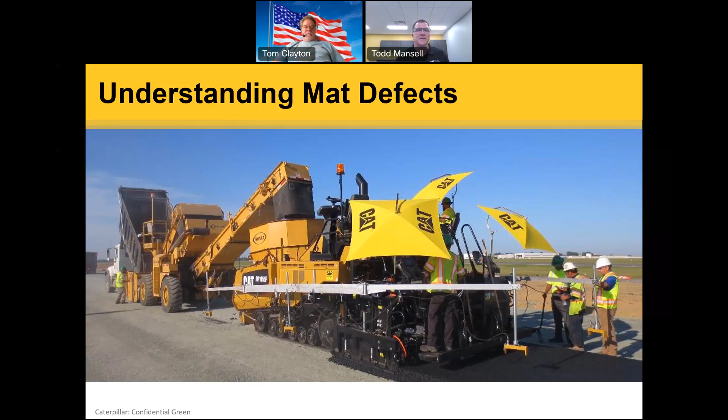So what I would like to get into is talking about understanding mat defects. One thing I always like to start off with on this topic is, how do I know if I have a mat defect? To me, it's obvious. So I'm looking behind the paver here as we're going along.

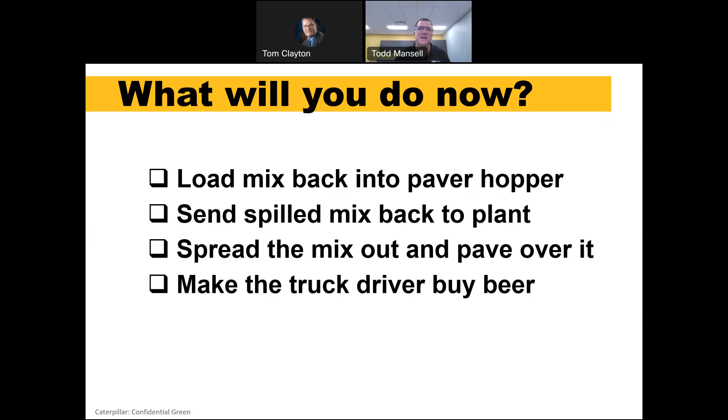But we saw that last image. So if I spilled mix in front of the paver, what would you do next? Are you going to load that mix back in, send it back to the plant, spread it out, pave over it, make the truck driver buy us a case of beer? I don't know, maybe, maybe some of all of the above. But what problems do those spills cause?

So again, that was a truck rolling away from the paver. There are other ways we can get these spills on the grade, but what do those spills on the grade end up becoming, or how are they a mat defect?

There's a really good likelihood that cold material, we're not getting density on it because it's cooling really fast. We may pave over it and it looks nice, and we don't even see that mat defect on the surface. So the mat surface may look great.

If I'm a roller operator on a steel drum roller, there's a good chance I'm going to feel that bump as I go over that material that spilled in front of the screed. There's also a good possibility, depending on the mix size and how thick a mat I'm paving, that I may end up dragging aggregates, or dragging rock, as we say.

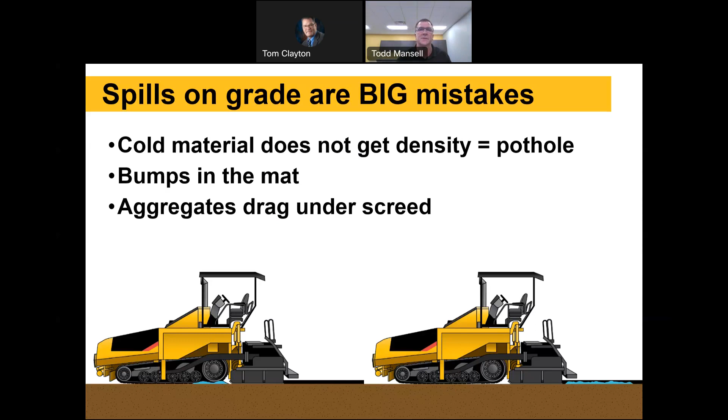But what's the end result of these spills on the grade? They quite often become potholes, right? So when I see those spills and we pave over them, and again, the surface of the mat may look nice, I call those the birth of a pothole.

And that's what you're going to see in the mat down the road. You're not going to see it right after paving. And again, you're probably going to see an effect on your IRI or your smoothness results as well with those spills on the grade. Here's a picture just showing a spill paved over, kind of dragging rock, if you will, as that screed goes over that high spot where that material spilled on the grade.

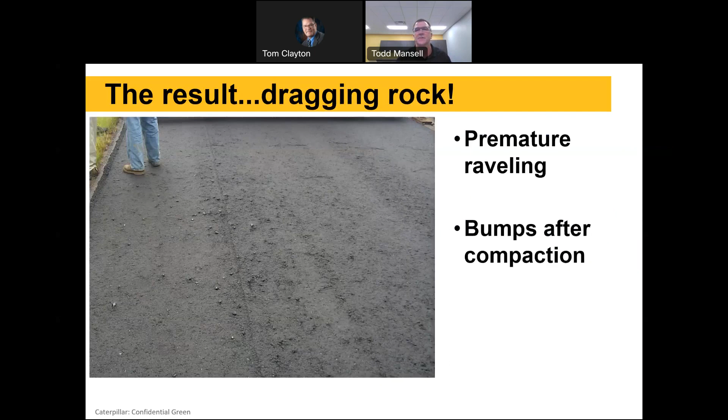So when will they show up? Again, it might be the day after - probably not the day after if you don't see it right away. It's likely to show up a year or two from now, again most likely in the form of a pothole.

So trucks spilling, that was just one example. Can you think of other situations? Banging out truck beds - I see this. I was just on a paving job right near home here in Minnesota, where I'm based, yesterday. Went out to a commercial job and they were banging their tailgates out right in front of the paver and cleaning out their truck beds, leaving those little piles of mix on the grade.

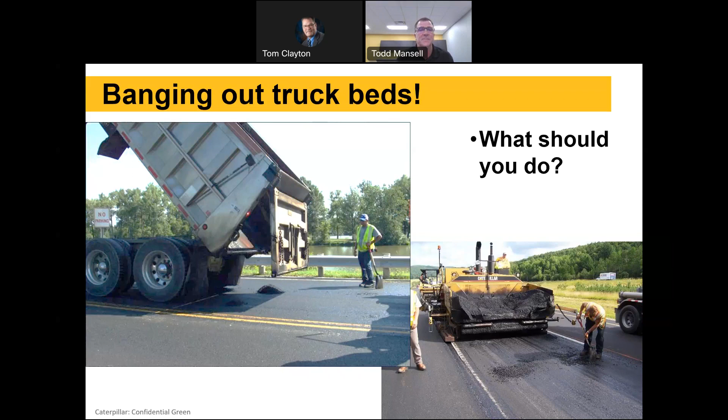So what should we do? If it's already happened and it's there, probably the best thing we can do is pick it up and throw it off to the side and get it later. Most often I'll see people spread it out a little bit - labor or somebody on a shovel kind of spreading it out a little thinner in front of the paver. Not the best answer, but better than leaving a big pile.

In a perfect world, send those trucks over to a designated clean out area, somewhere we can just dump that or bang out our tailgates or clean out our truck beds off to the side, especially on these highway jobs. So we can go clean out an area.

What do we do at the end of the day? We can, if we've got a skid steer or something on site, load that material back into a truck and send it back to the plant, to the recycle pile. Just different things to think about as far as material spilling on the grade.

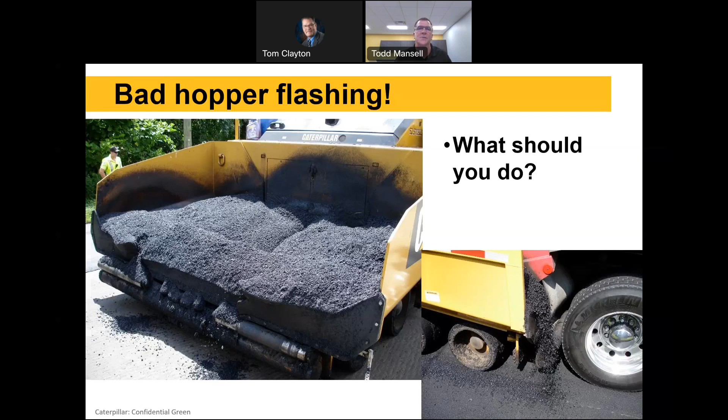Here's another one - folding the hopper wings, or in the bottom right-hand picture there, you can see the hopper flashing, the rubber belting on the front of the paver hopper isn't fitting well. So once that truck's dumping mix into the hopper, it's just all spilling out along the sides of the paver there as it goes along, cooling off and then getting compacted by the tires or tracks on the paver before we pave over it.

Folding the hopper wings, that's another one, and I'll talk a little bit more about that later, but it's just something that if we are folding the hopper wings as a paver operator, we want to be careful that we're not folding those hopper wings and spilling that material in front of the paver on the grade.

So lots of ways it can happen, and the big thing is to be aware of it and just understand or realize that there's a good possibility that's going to end up becoming a pothole or a defect in our mat in a year or so down the road. So just because it looks good right behind the screed doesn't mean that it's not there.

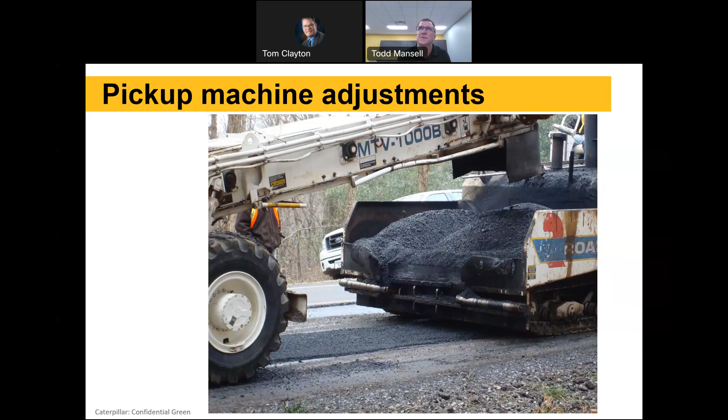Another one, when we get into pickup machines, if we're doing windrow paving and we've got a machine picking up off from the belly dumps or off the grade, those scraper plates that pick up material can be adjusted. You want to make sure they're adjusted so that they're getting a good clean pickup off the grade. In this picture, you can see a thin layer of material being left on the grade, not getting picked up and transferred into the paver hopper.

Just interrupt you for a second. Yeah, question. I don't know if you'll cover this later, but if you do, let us know. But that material that's being dumped in front of the paver, are you going to talk about the pre-compaction that's being done on it, if it's left with the trucks backing over it and the paver moving over it, and then the cracking that can or may occur?

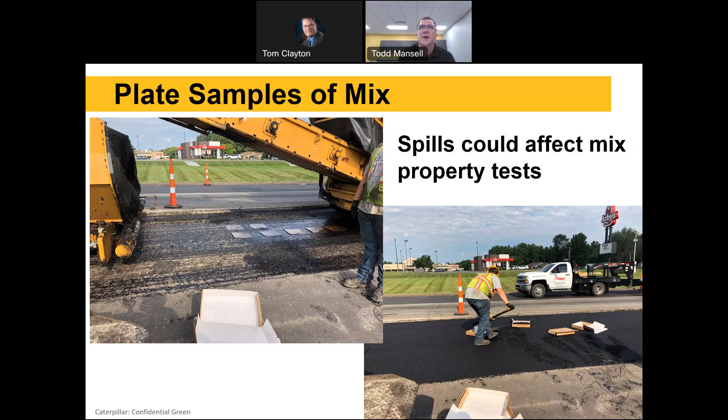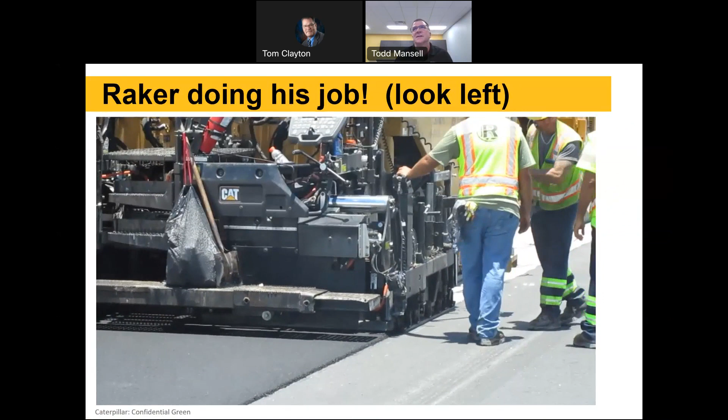This one, raking, is a little passionate and close to my heart. If you look at this picture, it's a bit of a rhetorical question, but which raker's doing his job? The guy on the left is raking like a madman, and the guy on the right is standing there holding the rake, watching the paver place the mat using the grade control. So again, rhetorical question, but it's the guy on the right that's really doing his job as a raker. He's there to make sure, if there's a problem along that joint, he can fix it if need be, but there's no need to be continuously raking material along that joint if the paver is set up properly and the grade control is set up properly.

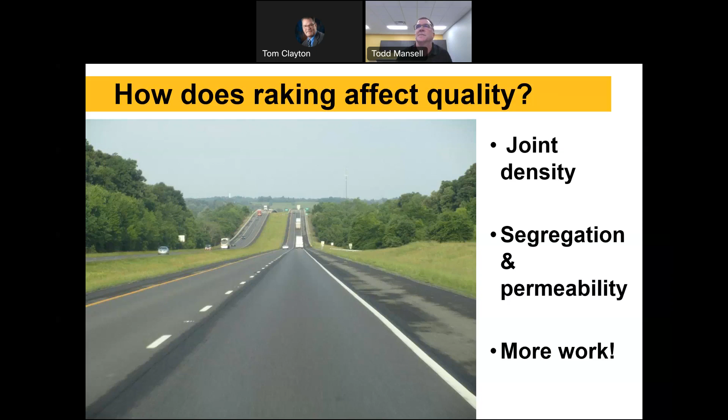And I'll show a few slides on that. But how does the raking affect the quality? Again, thinking mat defects - longitudinal joints are a big deal. We've all seen so many roads that look great, and the longitudinal joints are where it fails. This picture shows a beautiful looking mat all the way across, except for that centerline joint where it's separating or coming apart. One cause of that, or possible cause, is the raking and handwork on that joint.

Something just to think about: is it normal for your crew to rake that joint while you're paving? Yes, no, sometimes, maybe - I'm not waiting here for answers, but it's something to think about. Are you doing it? Are you not doing it? If you are doing it, why are you doing it? And when are you doing it?

This is really the big thing here: when you're raking that material along that joint - and I'm human, it's a tough job to do that all day long, walking beside the paver. So what do you do? Usually you set the rake or lute down on the cold side, and you kind of broadcast it across the mat a little bit or bump it. But you're pushing material away from that joint, from the hot side, from the cold onto the hot.

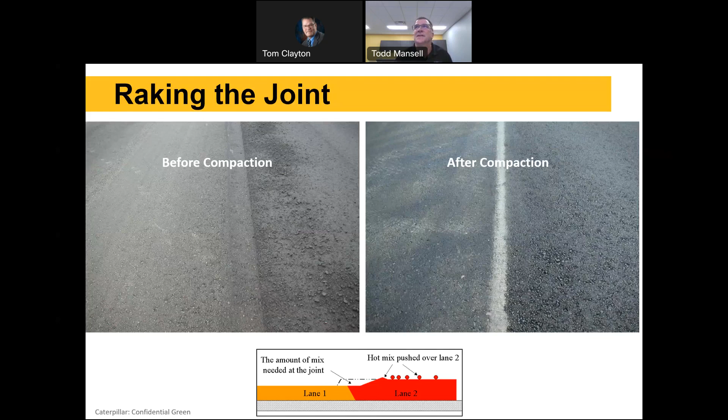Now you've got less material there to get compaction. It doesn't look as nice. You can always see on the right side here, on a joint that's been raked, you can always tell which lane was paved first, because you see that open texture on the other side where they kind of broadcast or push that mix across.

There are a few situations where we get really large stone mix or something like that, or a bit of a height mismatch for a little ways, where we may have to bump that joint a little bit. But as a general rule, for the most part, we should be able to set up so that we're not having to rake that joint very, very often.

So again, just a point to think about: if you're raking along that joint, why do we rake it? Basically if we have a little glitch, or a localized spot that we need to fix a little bit, maybe that's when we rake it. But doing it as a continuous thing all day long, following that paver, is probably not the better way of doing it.

So how can we eliminate that raking? I know I'm talking a lot about it, but I see it a lot as I travel around the country. I think we're getting better at it as an industry now, because we're seeing more emphasis on longitudinal joint density and specifications. But you have to have clean working end gates on the paver, and I'll show a picture of that.

You want that end gate down on that first pass. That's another thing I see a lot of times - that end gate's raised up in the air on that first unsupported edge or first pass. Then getting a correct height match with the screed. A lot of times we're raking that joint because we don't have a good height match with the existing lane. So when we pave the second lane, we're using the lute or rake to kind of fix or feather that joint together, where we should really be using our grade control or the machine to do that.

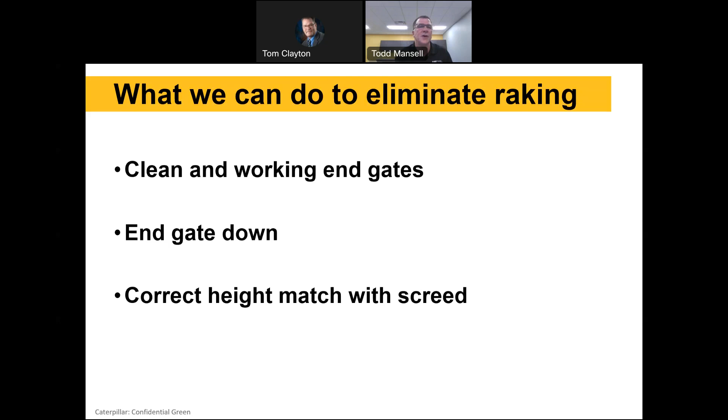So when you look at it here, end gates down, get a good square edge. Heated end gates may help a little bit - the biggest thing I think they do is just actually help keep the springs working, as in this picture.

If you look on the right side of that end gate, you can see those two sets of springs there. So when that end gate's down, those springs apply a little pressure, just enough to hold that end gate in contact with the existing grade. As the grade changes a little bit, the end gate always stays in contact. It's not enough force to raise or lower, move that screed, if you will.

But those springs get plugged up with mix. People don't clean them, so they just tend to leave them up and not use them. That red line coming out there - the heater, they're putting heat into the end gate. That red line is the high voltage electrical for the heat, screed heat, and on the end gate there. That's not a standard feature - heated end gates are optional.

This is just a picture at the bottom there. You can see on the left side, if you run that first pass with your end gate in the air, you get that mix fluff out at about a 45-degree angle and taper out. Then when you come back to match it, that mix tapers out to get that match. Typically one of two things happens - that's when we end up raking that joint, because if I just leave it tapered and run over it with the rollers, it's going to break a bunch of rock, and the roller will be teeter-tottering where you got aggregate or rock there and no thickness.

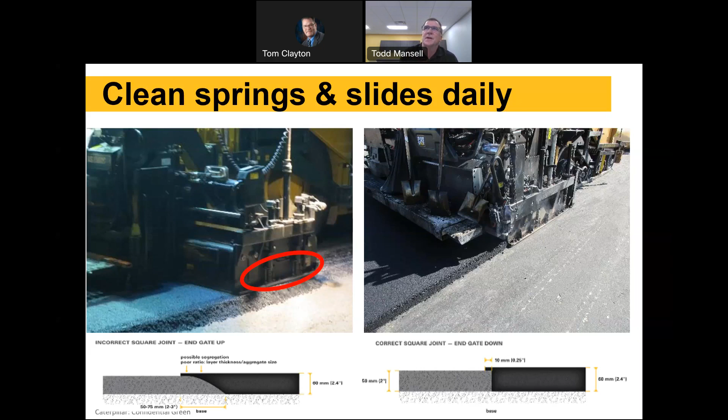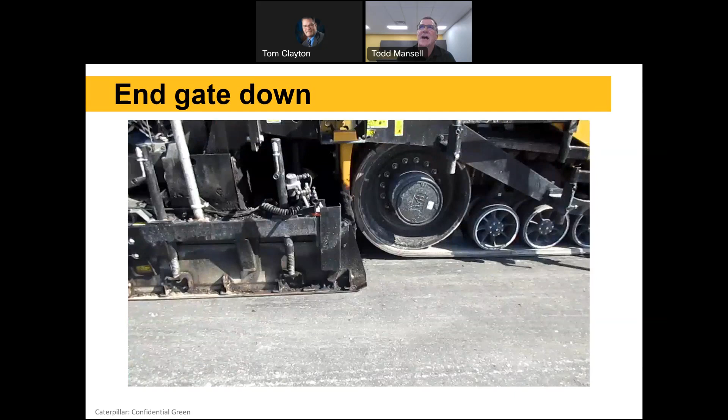So this is just a little video clip showing end gate down, springs nice and clean, so they can do that. This is on a pretty smooth surface, but you can do this on a milled surface or other surfaces as well. The key is getting that first pass with those end gates down, then getting a good height match.

So here we're coming back now, matching that first lane. We got a nice vertical edge. That grade control sensor positioned where it is, in line with the auger shaft, is going to give those guys a perfect joint match as far as matching the height. And of course, they'll allow that height to have enough roll down.

Typically we get about 1/4 of an inch per inch roll down. So in this case, if that existing mat was 2 inches, they would have that grade control set up so that the new mat they're putting down would be 1/2 inch higher at the joint. Then after they roll it, now they've got a perfect joint match. Using the automatic grade control can really help with getting a good joint match and getting rid of having to do very much, if any, raking.

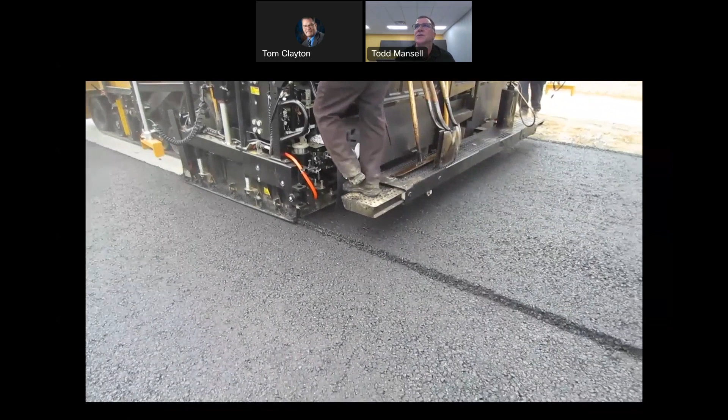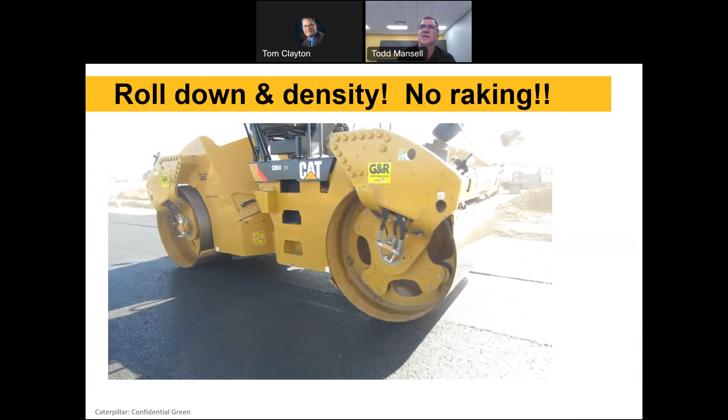And coming in with the roller, same job there. Again, there's the first roller pass. I'd like to see a little more of an angle at the end of that pass, and then coming back. This is only hitting it twice, and he'll come back and hit it a couple more times, but you can see they're getting pretty close to a really good joint match.

And if they're not there, all they have to do is tweak the grade control up a few millimeters, or down if they're a little too high after compaction. So lots of preaching on that, but I see it a lot, and it's one area that we can really get rid of a lot of mat defect.

On that unsupported edge, talking from a rolling perspective, here you see about a 6-inch overhang on that edge. That's normally what I recommend to get the best joint density you can get on that unsupported edge, because that steel drum is rigid - the force is acting straight down, or vertically. And if I get inside that edge, I'll have a tendency to push that mix out. So most of our mixes nowadays are stable enough, they'll support the weight of that roller with a 6-inch overhang on that unsupported edge.

Back in the day, before Superpave, when we had round rock and pit run rock used in mixes, they weren't always stable enough to be able to do that. That roller might roll over a bit on that edge doing this. But nowadays, I'd say 9 times out of 10 or even more, the mix can support the weight of that roller hanging off that edge.

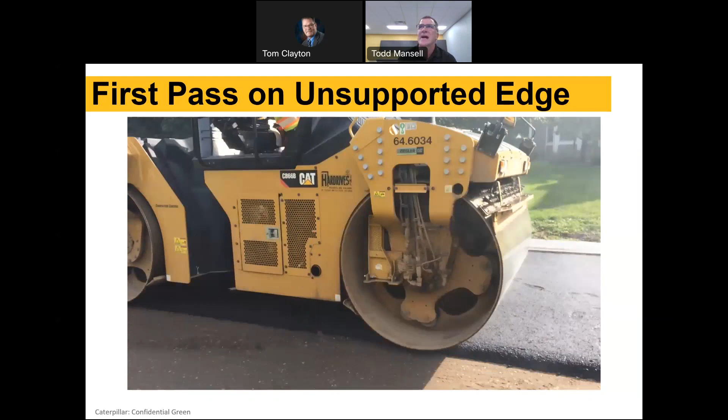In the few cases that it can't, then I would go inside about a foot off of that edge. But like I say, nine times or more out of 10, the mixes seem stable enough these days to support that roller, so you can do what Patty's doing here, hanging that drum off the edge. You don't see the mat pushing or shoving out or anything - it's just giving her the best density she can get on that unsupported edge.

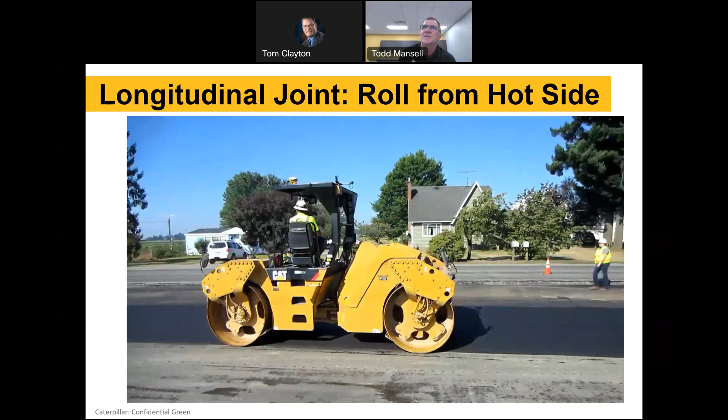A couple more clips. There's Dave on a roller here, overlapping - he's on the hot side, hanging about 6 inches onto the cold on that first pass. Probably going just a little bit fast here, but he's hitting it from the hot side, about 6 inches onto the cold side. You want the highest joint density. He's about a foot, 6 to 8 inches, maybe as much as a foot inside on the first pass, all the way on the hot side.

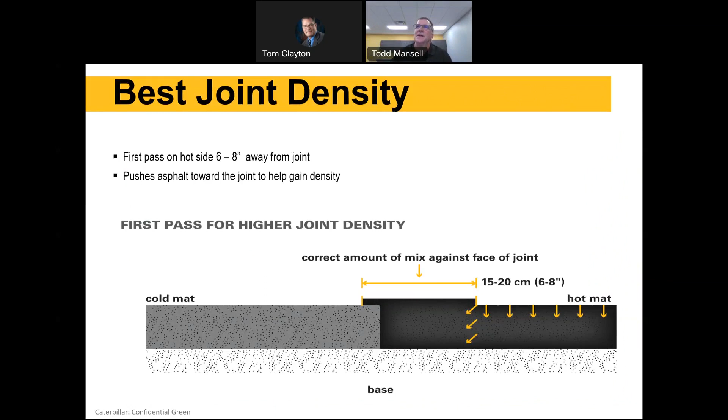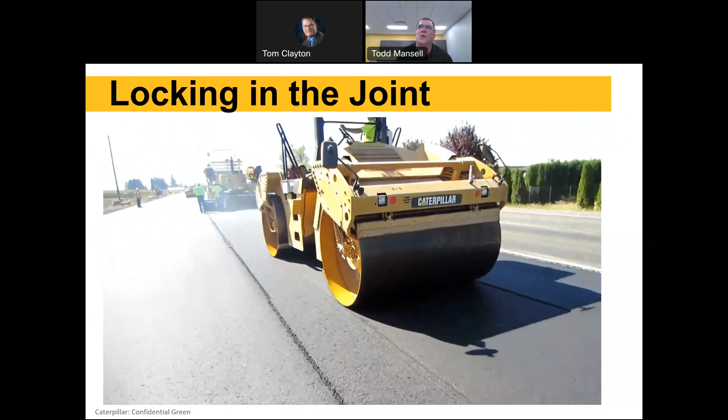Now he's locking in that mix between the cold lane and the hot lane, and that little strip of mix along the joint when he comes back to hit it. So there's his first pass all the way on the hot side. This looks like about a foot - it's going to vary a little depending on how thick your lift is and how much it's compacting on each pass, how far in you are with the roller. But he gets to the end of this pass, rolls onto the cold lane because he can, and then comes back and hits that area along the joint there.

Again, in this case, joint densities - you couldn't tell the difference between the main line of the mat and the joint. So when we just looked at the numbers on our sheet afterwards, without the location, you wouldn't know where they were coming from on the mat. Really good joint densities with that approach. But again, it relied on Dave, the roller operator, talking to the screed operator on the left side there to tweak the height. So they're using joint matching, automatic grade control, tweak the height a little to get the right match after roll down.

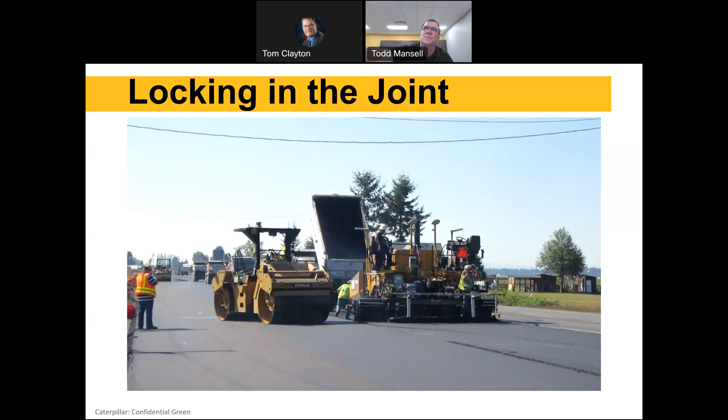And if you've got a pneumatic, they're good at straddling that joint after the steel drums hit it, just for good joint density.

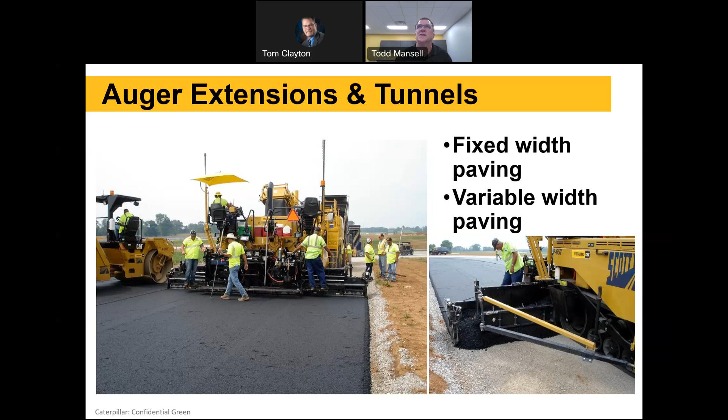Auger extensions, tunnels - still talking mat defects. So we've got two situations when we get into wide width paving. We've got fixed width, so we're paving wide but not winging in or out - keeping it at 12 feet wide, or 17 or 20 feet, or whatever wide width we're doing. That's fixed width. And then variable width - we're paving along at a wider width, but we've got to bring in the wings to go around obstacles, or our width is varying at different locations.

If we're looking at fixed width paving, the width is constant, so we can set that screed up. It's got hydraulic extensions on it that wing in and out, and then we've also got bolt-on extensions that we can attach to the end of those hydraulic extensions, depending on how wide we're paving. The big thing here is having the auger extensions and the tunnel or mainframe extensions to match our paving width. If we're set up on fixed width paving, it's easier in the sense that I can run out.

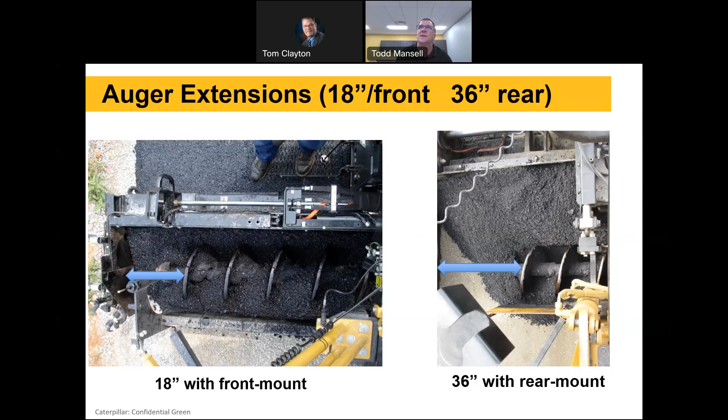On the right side, you're looking at a rear mount screed where the extensions are behind the main screed. That mix tends to flow out off the augers at a 45-degree angle into that rear extension. Because of the nature of that material flow coming into the rear mount screed, we can get away with up to about 3 feet from the last auger segment to that end gate without having to have quite as much auger extension when we're on that rear mount screed. But we always want to have tunnel extension in front of the augers, regardless of front mount or rear mount screed.

Because what happens is that mix will want to roll forward. It'll leave stripes in your mat, so it'll be a texture issue. And if it's bad enough, that can end up just being segregation, and you'll see the stripes in the mat behind the paver.

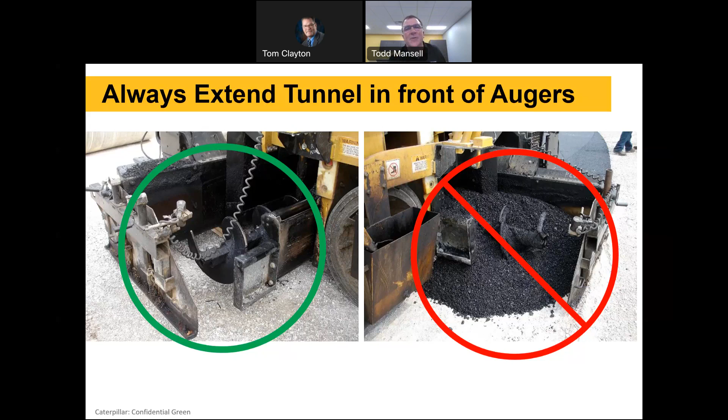So the next slide, I'm going to show a little video clip. You kind of have to watch the mat coming out behind the paver. I think it's maybe a little hard to see, but definitely overloaded here, right?

And the worst part about this one is this was fixed width paving. These guys weren't variable width, weren't bringing that wing in or out, but they have to really overload that extension to get enough mix out to the edge because they didn't have enough auger in there or tunnel extension.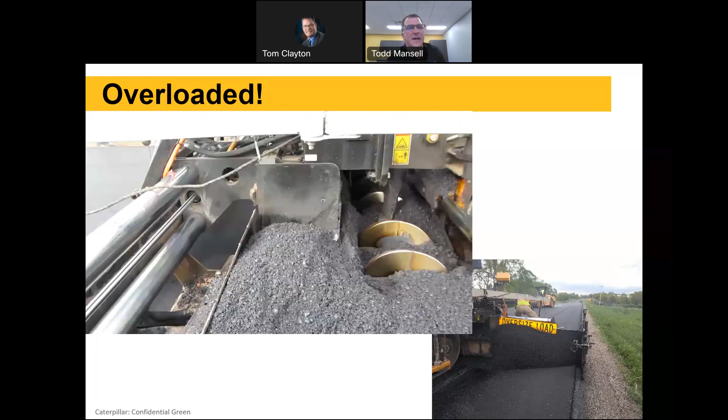I know it was a bit of a quick sweep back there in the video, but all that mix in that screed extension there was causing a lot of texture issues. And again, you're even going to get segregation because what do big rocks like to do? They like to roll out into the corner of that screed, the screed and the end gate. So always want to get tunnel and auger extensions out there whenever you can.

And the time it gets tricky is when you're doing that variable width paving, because you can't have auger extension or tunnel out there if you're going to be bringing that wing back in. That's when you really need to have somebody ready on the shovel to shovel mix out there when you're going wider, to minimize or eliminate segregation going on by overloading that screed.

Another thing I wanted to hit on - in this picture, if you look closely, you can see chatter in the mat. My first inclination was to blame the rollers, but you look at that chatter and it goes all the way across the mat. A roller isn't the full mat width, so right away that tells me that's being caused by the screed.

So that's going to affect our smoothness, it's going to affect our density when we get there. What's causing it? Could be a high angle of attack on the screed. Typically we want to run at a quarter inch angle of attack. We could be running too high, and I'll touch on that some more later here.

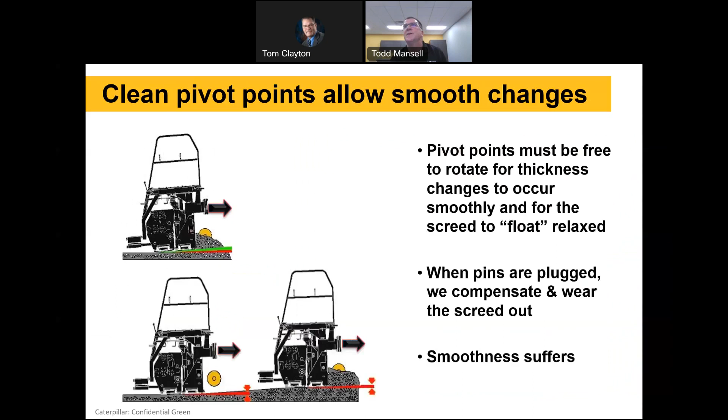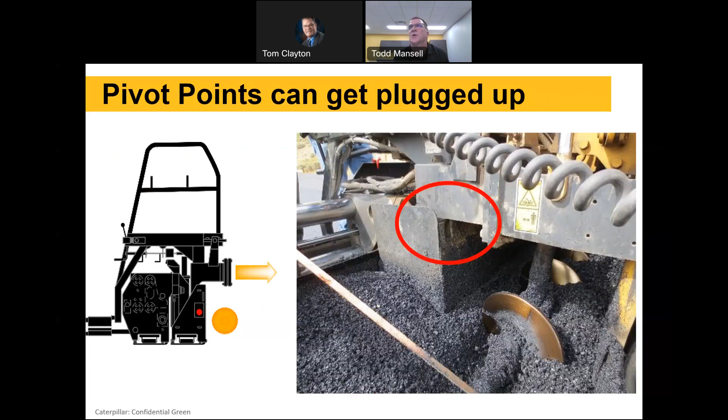And then we end up getting chatter in the mat, because we're trying to fix it by running too high of an angle of attack, when the real problem is material down in around that pivot point, not allowing that screed to rotate around that pivot point. This is a picture looking down in where that drop arm goes, and that pinned connection is down there. It's hard to see in a picture, but it's buried under that cold asphalt mix that got down there. The only way to get that out is take that cover plate off the side and just clean that mix out of there, so that pivot point is free to rotate.

And if you're on the paver, you know it - you go to turn the depth cranks, the screws, and you can't turn them very far, or they're super tight. Good chance that maybe you've got mix down in there that just needs to be cleaned out, because screeds will get overloaded, mix will get down in there. It's not what we want, but it's usually a matter of time, and it will happen at some point.

So we just got to make sure they're good and clean. There's different ways of doing it - I've seen people put little bits of conveyor belt on there to help prevent that mix from getting down in there. In a perfect world, we're not running the mix that high to get down there to begin with, but it does happen every so often.

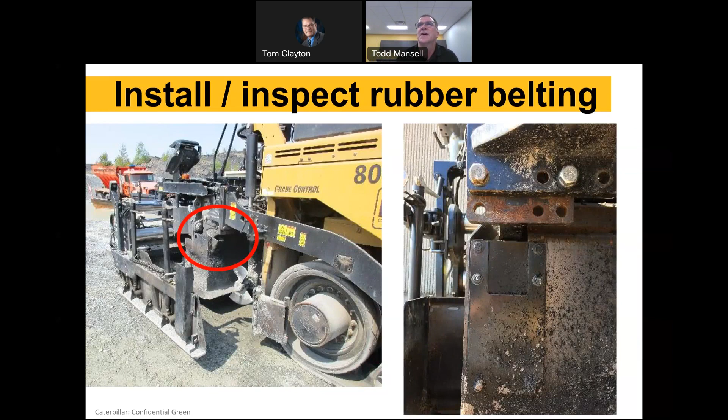And we talk about mat defects, thinking about the paver set down and takeoff. So I just mentioned that angle of attack and chatter in our mat. That being a defect, if we're getting chatter, that's affecting our smoothness, and in my world, that's a mat defect. Even though it's not necessarily a visual one, you're going to feel it in the ride.

But we do a lot of our training. A lot that I do is what we call our paving by the numbers, and it's just a 15-step procedure. Once you get used to it, you just go through it, and you don't even consciously think about all the steps. But you do these steps consistently, religiously, every time you set down that screed to take off, to get a good, smooth takeoff at the right angle of attack with that screed.

So I'm not going to go through all these, but what I would like to do is just hit on a couple of what I'll call the big ones in those 15 steps. And one of them is step number 2, setting our toe points before we take off.

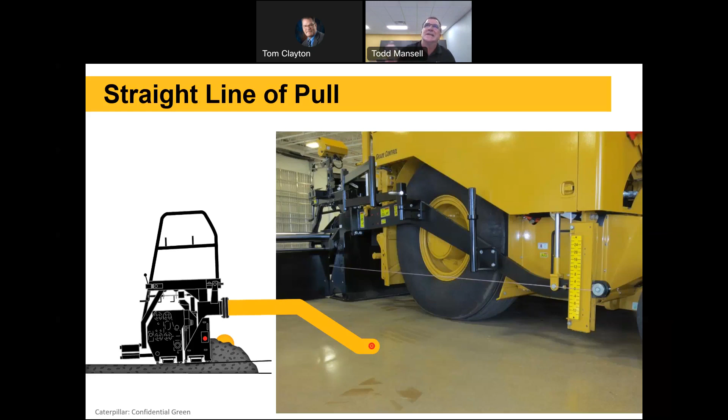So setting that toe point to the right height based on the thickness of the mat we're paving. It's not always going to be at zero. It's going to depend how thick we're paving. But the goal here is to take off with that straight line of pull, where that pivot point and that toe point are in line or parallel with each other. I'm not getting into the details of this today, it's a separate little training event, but setting that toe point to get that straight line of pull before we take off is critical. Because if I don't, I'll try correcting once I get paving, and that's again where I may be running a higher angle of attack than I really want to be, and that can end up giving me that chatter in the mat.

So that angle of attack, it's the relationship between the nose of the screed and the trailing edge. So a little bit of nose up attitude. Again, we want about a quarter of an inch angle of attack while we're paving. So we're setting that up before we even take off by setting our extension, our extender height. This is step 5 in the paving by the numbers. Set our extension height before we set that screed down to take off. And that extension height is what's going to establish my quarter inch angle of attack.

So on a rear mount screed, I'm setting it at a quarter inch before I put the screed down on the starter boards. On a front mount screed, I would set it at a quarter inch below zero, my extender height. And what that's going to do, after I null out and everything, is ensure that I'm paving at a quarter inch angle of attack.

Why does that matter? Because if I go back to the screed here, if you look at that screed plate all the way from the nose or the front all the way to the back, it's all that screed's free floating. The only thing holding it up while we're paving is the mix underneath it. So the more plate I have in contact with the mix, the better flotation. The screed's going to float better. I'm going to have more control over it when I change thickness or when I change slope.

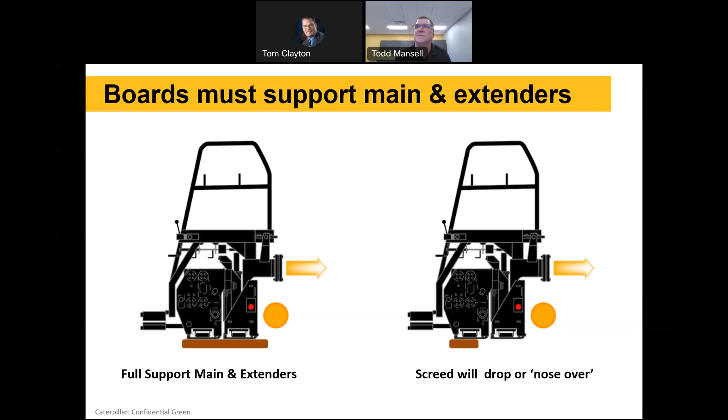If I just use a little piece of rock or a pop can or something like that - I used to be that guy, Todd, go find a pop can in the ditch or a couple of rocks about the same size and set the screed on. If I set it down on a little board or whatever that doesn't go all the way underneath that extension and the main screed plate, that screed, when I take off from my starting boards, it's going to want to nose over or roll over on me. And that gives me my bump when I take off, or my dip. So it's really important to have full length boards to go underneath that screed before we take off.

I'm going to show a little animation here and then we'll get into some other mat defects. But this is getting ready to take off, so setting that angle of attack.

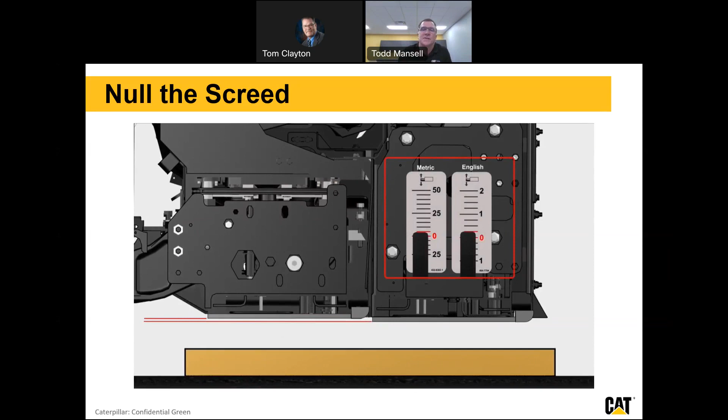So the next 2 little things I just want to show are common mistakes I see in the field. So the screed's up in the air, step 5, paving by the numbers. We raise it up, raise the extension up 1/4 inch. So that's all, life's good. Now we're going to float the screed onto our 4-foot starting boards. Here we go, press the float button.

Screed comes down. Pull out that little bit of slack at the tow point, just inch forward. Now we're going to null out again, so turn our depth screws on the right and left side to relax that screed. So it rolls back what? Again, it's 1/4 inch, right? So that's good, same thing we already did on the first one.

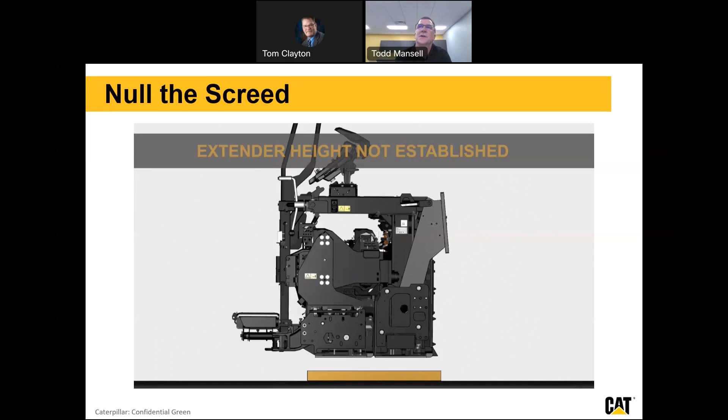But now the difference is, that first one we relaxed it and rolled it back. Now a buddy on the screed here thinks he needs to put 3 or 4 turns into it. So what did we do? We were at 1/4 inch and relaxed, and now I just put 3 cranks into that screw. I don't know what angle I'm at now. All I know is it's more than 1/4 inch, and I've got all that pressure on that trailing edge of the screed. Once I take off, I'm going to be at a high angle of attack, a lot higher than 1/4 inch.

And then the last one I just want to show here - they just skipped step 5, they didn't even raise the extender height. They just dropped the screed onto the starter boards. So there's no angle here, right? And now after they take that little slack out, they're going to null out and relax that screed. It's nice and relaxed, but there's no angle of attack in there. I can guarantee you're going to have a nice, really open textured mat, because it's going to drag and kind of tear the mat, if you will, once you get paving.

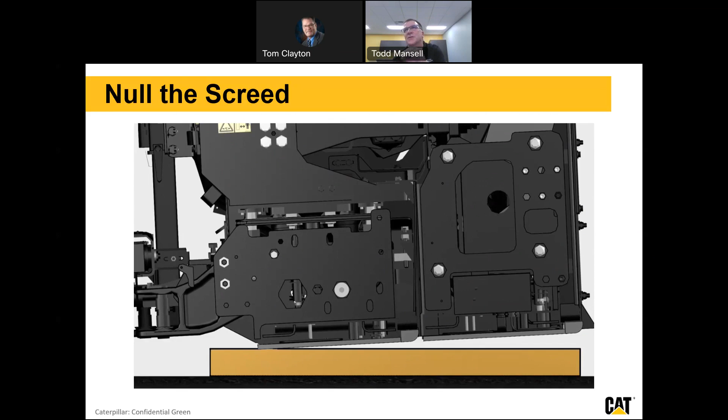And it's going to be hard again. Think of the screed like an airplane wing. They know that, so what do they do? They put a bunch of cranks into it, and now we don't know what angle of attack we're at. All I know is it's high and all riding on that trailing edge. So think of that screed again like an airplane wing - it's got to have mix coming under it, supporting it, but it's got all that pressure on that trailing edge. In this case, it's going to be like chatter, chatter, chatter.

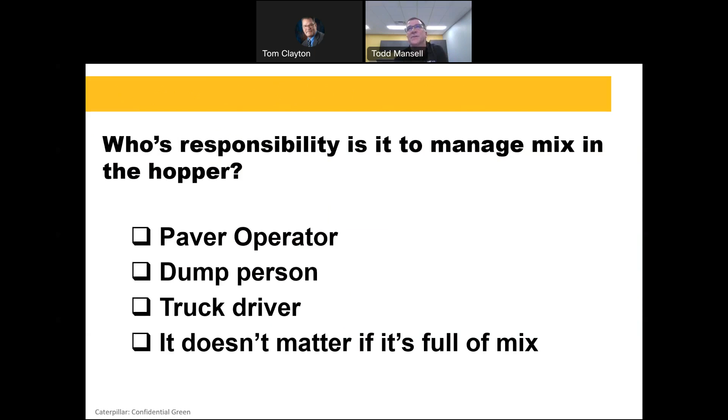Switching gears, managing mix in the hopper. So we look at the hopper level here, we're empty, right? Not good. So whose responsibility is it - paver operator, dump person, truck driver? Doesn't matter. I'm going to say it's probably the paver operator and the dump person are the two main people looking at that hopper level. Why do you care about it?

Because if you get that lower hopper level, what do we get? We get segregation. Where do big rocks always want to roll to? They want to roll to the outside edges of the hopper. They want to roll onto the chains or the conveyors in the middle of the hopper that are taking the mix back. So if we run that hopper level too low, we end up with segregation. That's going to affect our smoothness, our density, our durability of that mix because it's segregated. And head of material - every time we run that hopper low, it's affecting the head of material, or the amount of mix back at the screed. That's going to affect our smoothness as well.

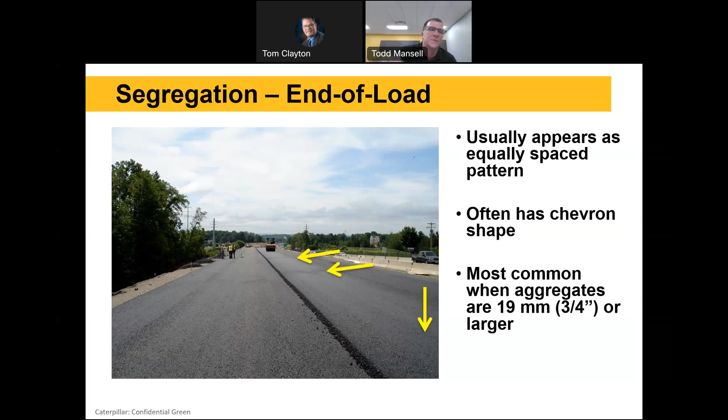Here's a classic end of load segregation. Every truckload, pace it off 20 paces, I see what I'll call a rock pocket. And like I say, they're just equally spaced. I can tell that paver operator ran that hopper low at the end of every truck.

So when we look at segregation, what do we get? Generally we've got three kind of main types. We've got patch segregation, we've got stripes - those would be continuous type stripes that we see in the mat. And then the hardest ones to troubleshoot are the random patches that we see. So continuous stripes or regular patches like that end of load are a little easier to troubleshoot. It's the random ones that don't have any even spacing or pattern to them that are a little more difficult to troubleshoot.

So when we look at truck exchanges, that's important if we're end dumping into the paver as far as managing that hopper level. Here you've got the paver pushing a truck. It's really the paver operator and the dump person, if you have a separate person dumping trucks - a lot of times that's the paver operator giving signals to the truck driver when to raise and lower the truck bed and when to pull away. But working together, good communication, understanding the signals for raise the bed, lower the bed, and when to do that.

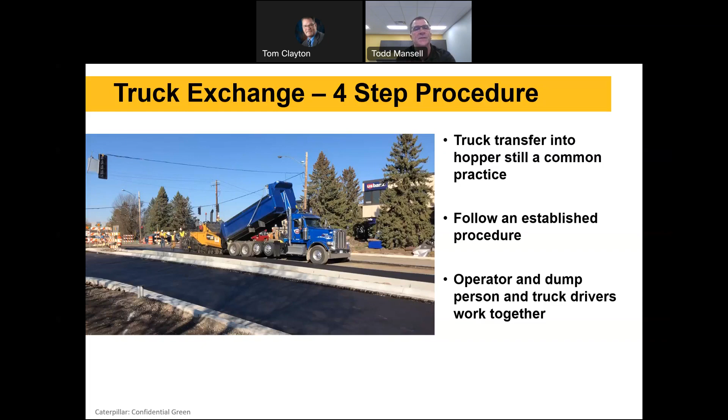It's really that truck exchange, if we're end dumping - I think of it as a 4-step procedure. Step 1, we're paving along, we've got a truck up there, all the mix is now in the hopper. As soon as that bed or that truck's empty, we're going to release that truck - give them the signal, lower the truck bed and pull away. As a paver operator, we're gonna just keep paving at our normal paving speed. Not slowing down and then speeding up, because that's going to affect our head of material and our smoothness. So we keep paving at our normal speed.

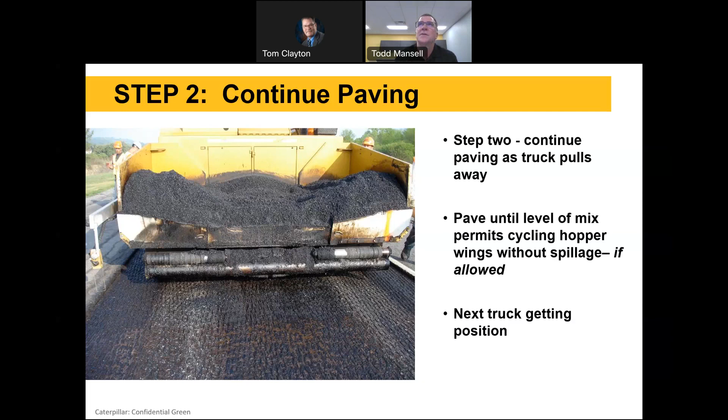Step two, we're paving along as that truck pulls away. We're gonna keep going until that mix level gets down a little bit in there. If we are folding the hopper wings, we can start to fold those wings as long as we have enough mix there where we're not exposing the slat conveyors, the chains, or the tunnels in the paver hopper. Large stone mixes, 1 inch and bigger, it's generally not a good practice to fold the hopper wings, segregation wise. But if we do it carefully, we can do it without spilling on the grade in front of the paver and without sacrificing our head of material or getting segregation in the hopper. So next truck's getting in position as we're paving along.

In this case, the paver operator's folding the hopper wings carefully. I do see a couple little rocks on the grade there, but he's not spilling a bunch of material on the grade and then bringing that mix in toward the middle while still keeping those conveyors and tunnel openings covered with mix. So there's your large stone mix. Again, generally probably a better idea when you're in 1 inch, 1.25 inch, or 1.5 inch base mix like this, probably a better idea not to be folding the hopper wings.

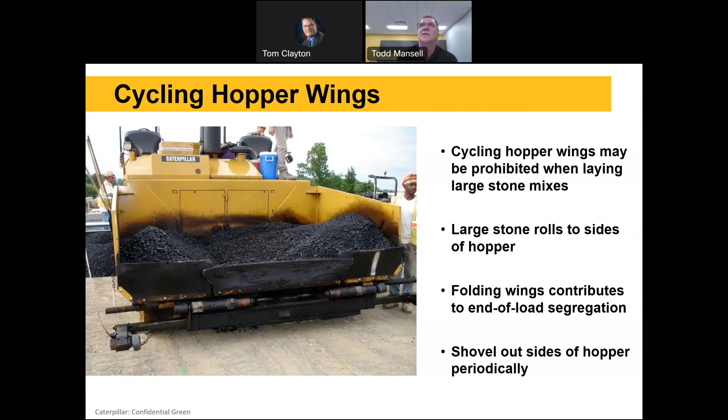Just have to shovel them out periodically or even clean it out at the end of the day. So we're going to get to a point where on that truck exchange, got a little bit spilling out here. We're going to stop quickly. So I mentioned earlier, truck releases, we're paving at normal speed, going to let the hopper level get down a bit, but we're going to stop before it gets down to the point where we're seeing the chains or the tunnel openings.

Because again, that's segregation ahead of material when we start seeing the tunnel openings. That mix, now the paver's made a quick stop. So let's just say it was paving at 30 feet a minute, just picking a number. So he's paving along and now doesn't want that mix to get all the way down. Next truck isn't right there yet. Quick stop, all the way to neutral. Once that next truck gets in position, stops just short of the paver, paver's gonna go full speed, full propel, right back up to that 30 feet a minute.

And the key there is, when I first got into paving, they said the best paver operator never stops the paver. You keep it moving. And we didn't measure IRI back in the day. We kicked a 10-foot straight edge, or maybe every once in a while we had a 25-footer we pulled out and checked our smoothness or our longitudinal profile. And it didn't pick up those little dips. But you look at IRI now, and I'm sure there's people here that understand it a lot better than I do, but you're looking at 100-foot wavelengths, 30-meter wavelengths now, and it'll pick that up.

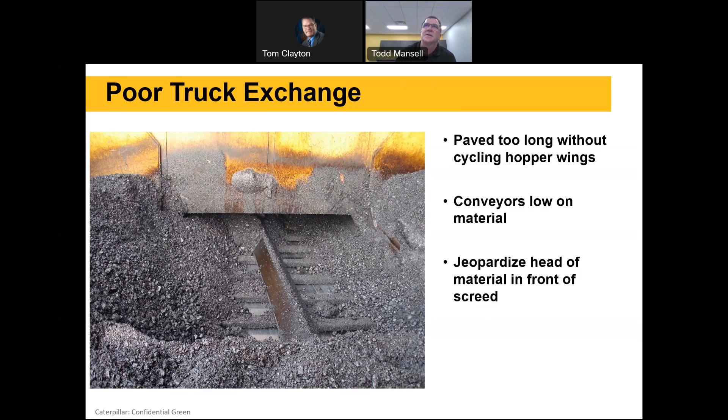And this is what you don't want to do. Again, you don't want to see the tunnel openings or the chains. Again, segregation. What's the first thing that's going to come through there once I get more mix on top of it? A bunch of rocks, right? I'm going to have that rock pocket. And that's your end of load segregation when you do this in between truck loads.

And what's the other big thing, and I feel really bad showing this video because these guys did an awesome job on smoothness, and I just happened to catch them one time during the whole day, but that truck backs up and you want that truck stopping just short of the paver, right? Not bumping into it like that. And what happens if it's bad enough or a big enough hit, if you will, when that truck backs up, it's going to push that screed and leave a mark, a screed mark that if it's bad enough, that's not going to roll out. It'll still be there even after compaction.

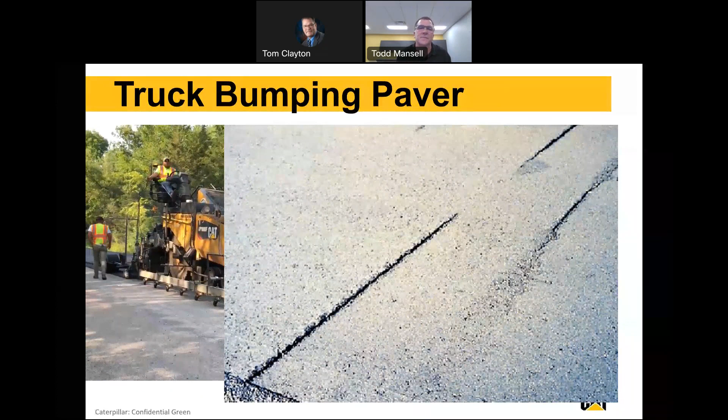So what do we do? We bring that truck in, we stop it just short of the paver, a few inches short. Dump guy there's got good hand signals going, stops them short, and then the paver's going to go full propel back up to paving speed and pick up that truck.

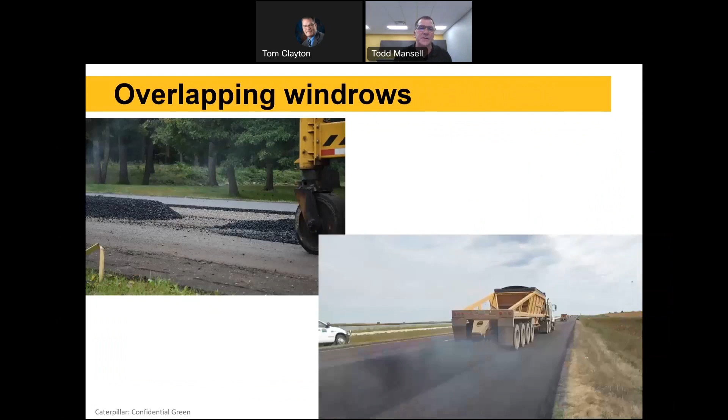Windrow paving, big thing here, because again, I'm thinking about segregation and smoothness. So in the top left, if I've got a bone pile at the end of my windrow coming out of that belly dump, what's the pickup machine going to do? You're going to have a bunch of rocks. So even though end of load segregation, you can have it with end dumps, you can have it with belly dumps. So really critical to overlap those windrows. That's going to minimize or eliminate that segregation happening, the rock pockets, and it's also going to help you maintain that good head of material back at the screed for good smoothness.

So also overlapping the windrows, couple truckloads strung out at the most, as far as just thinking temperature management here in terms of density on the job.

So a couple truckloads generally at the most ahead of that paver, have the other one staged. A rule of thumb I've found: if the paver's going to sit and wait for a little bit, it depends on the weather, the ambient conditions, how fast that mix is going to cool down, whether we actually have to pick up and set down again, build a transverse joint if we're going to sit for a long time.

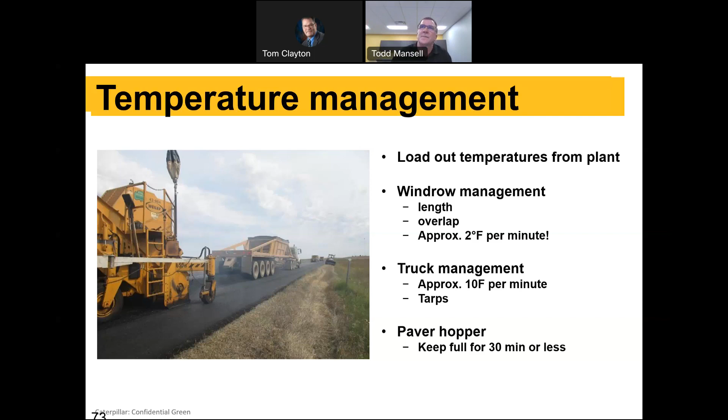But a lot of times if that hopper is full, we might have up to as much as a half an hour where we're still not going to be perfect, but it's going to hold heat in there. A full hopper is going to hold heat better than a hopper that's almost empty or getting low. So if we got to wait a little bit, or wait a long time, best thing is pick up and set down again when we get the next trucks in. But that's just showing, keeping the windrows fairly short, no more than a couple truckloads ahead of the paver or the pickup machine in this case.

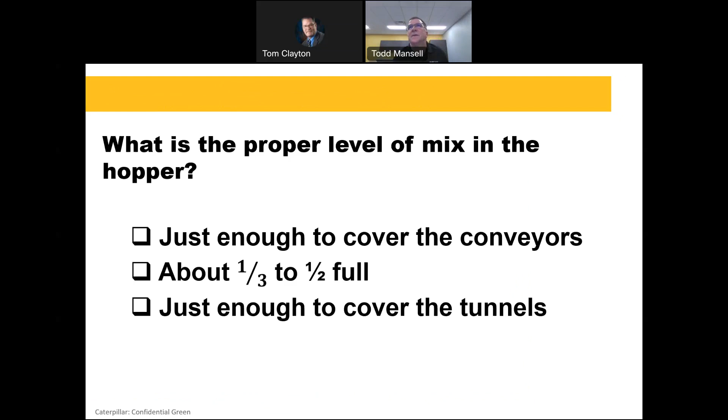So as soon as that comes through, the head of material, the amount of mix back at the augers, is going to drop and that screed's going to drop. It's going to put a dip in our mat. But we're pretty smart, we know this is going to happen because we ran the hopper right down. So what do we do? We dump that truck in, we dump it in there. And then what do we do?

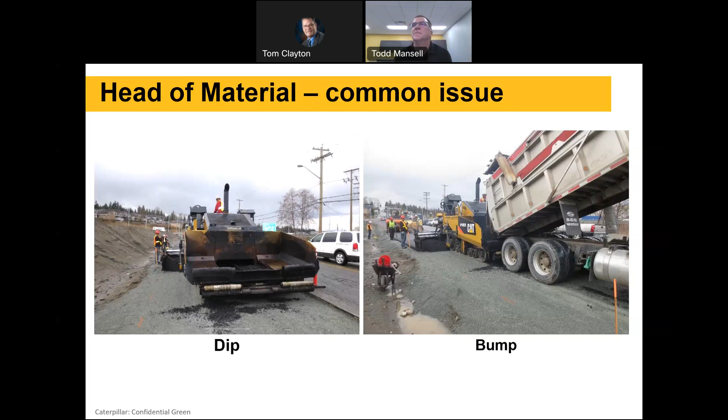I hit the manual overrides and I fill up that auger chamber, the chains and the tunnels, right? I generally have a tendency to overfill it when I do that, so I bring too much mix back now. And then what happens, I take off that head of material, I've got a big head of material there, and that screed does a little rise up on me and then comes back down again - and there's my bump. So it's more common than I would like to see, but very common. I'll see this and you get the little dip and then the bump - dip, bump, dip, bump - by doing that.

And it all goes back again to this head of material, the amount of mix back at the auger chamber. So as long as it's consistent, the feed coming back from the hopper, we're going to have that consistent head of material. Because remember, that screed is free floating - the only thing holding it up while we're paving is the mix. So every time the mix height in the auger chamber, that head of material, changes - it drops, screed drops; it increases, screed goes up. So consistency is the key word there. And that's how this all relates back to what's in the hopper and what's coming back from the hopper.

So how do I manage that head of material? I've got conveyor ratio dials, I've got auger height that I can set on the paver, on the machine, I've got auger speed, and then aiming my feed sensors. So those four things are really the tools I have to control the head of material, or the amount of mix back there.

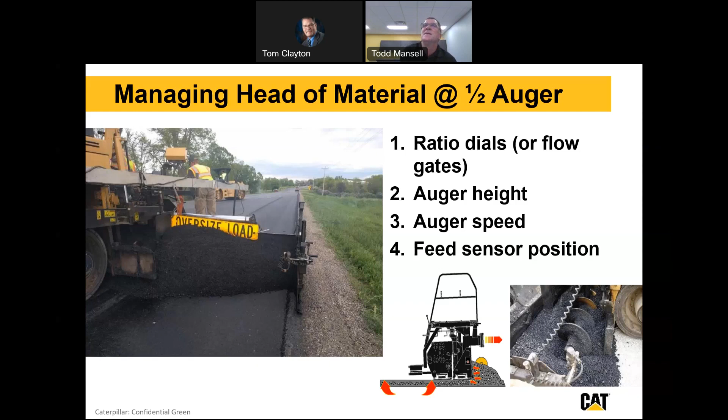Those are the four things. I'd say 95% of all mat defects are related to managing that head of material. These four things right here. So I'm going to hit on them quick.

Mix level at the center of the auger chamber - that's my half auger height head of material. I've got conveyor ratio dials in the top left, up at the paver operator's control. I use those dials to change the speed of the conveyors to bring more or less mix back to the screed.

The bottom center picture is on the older model pavers or some of the smaller commercial pavers. Instead of those variable speed conveyors to bring the mix back, you've got flow gates. So the conveyors, the chain speed is constant, but I can raise or lower those flow gates to regulate how much mix is coming back to the auger chamber. So two different ways of doing the same thing depending on the paver you have.

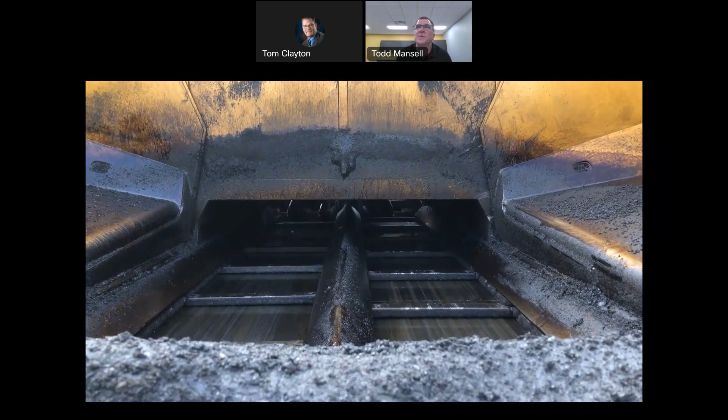There's just a view in there for anyone who may not be familiar. There's your hopper chains or conveyors, and then looking through the tunnel there, you can see the augers back there that spread the mix across the face of the screed.

Then I've got auger height. General rule of thumb here - this was in our paving by the numbers - but we want the bottom of that auger flight to be about 2 inches above our mat while we're paving. Another key thing, most crews are pretty good about this, but if that auger's too low, I'll have an open textured mat and I'll be starving that screed for material.

So it won't want to float properly, and I'll be fighting it by trying to make adjustments with the depth screws. And then I'm generally running at a high angle of attack and having mat quality issues that way.

Open texture, maybe good risk of chatter in the mat. If I got the augers too high, then good chance I'm just carrying a lot more mix or a lot more material back there than I really need to. So general rule, about 2 inches above the mat I'm paving, and that can be tweaked up or down a little bit.

The other big thing is 20 to 40 RPMs for auger speed. If those augers get going too fast, they're going to segregate that mix. You're going to see the rocks, the big rocks kind of flying off the end of those augers, and you're going to see stripes in the mat texture. So again, about 20 to 40 RPM there.

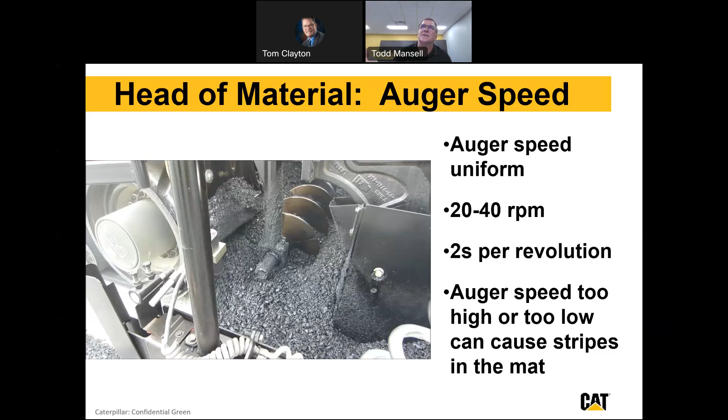So getting in that 20 to 40 range, the only way I can do that is if I have my feed sensors aimed properly. These are sonic feed sensors - probably 90% of what people are using nowadays. There are paddle sensors, I'm not going to get into those today, but they do the same function.

But these sonic feed sensors are controlling the amount of mix at the outboard end of the augers. They're sonic - they send sound waves, measure distance from the sensor to the mix. And as I adjust the mix height dial on the screed, that'll raise or lower the amount of mix back there.

If I've got it off at a steep angle to where that mix is, some of that sound wave or signal gets lost in space, and they're just not as accurate. You don't have as good control. So aiming them properly is really important.

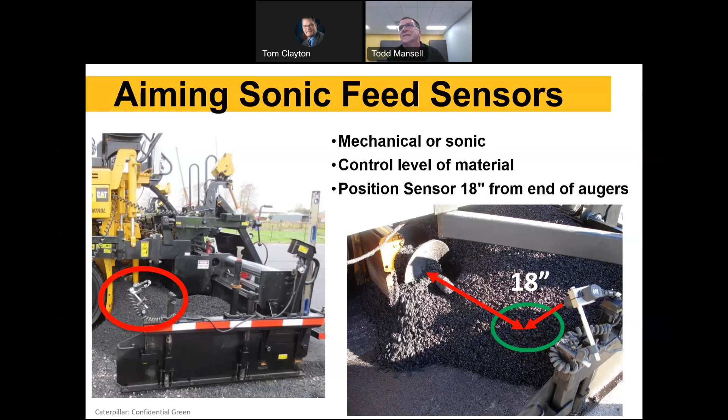In this picture you can also see it looks like the augers were probably going pretty fast, the way that mix is kind of flying out around that tunnel extension there. But aiming those feed sensors is really critical. I see a lot of crews just point them in one spot or straight down and leave them there, and you get that on-off auger.

If I've got coarse mix on one side of the truck and fine mix on the other, maybe it's an issue at the plant, right? Their batchers are loading out coarse on one side of the truck, and it's coming from the truck through the paver and being open textured or segregated even on one side. But the first thing I'd look at is check those augers are turning constantly, then go look in the truck, and maybe trace it, if it is that, back to the plant.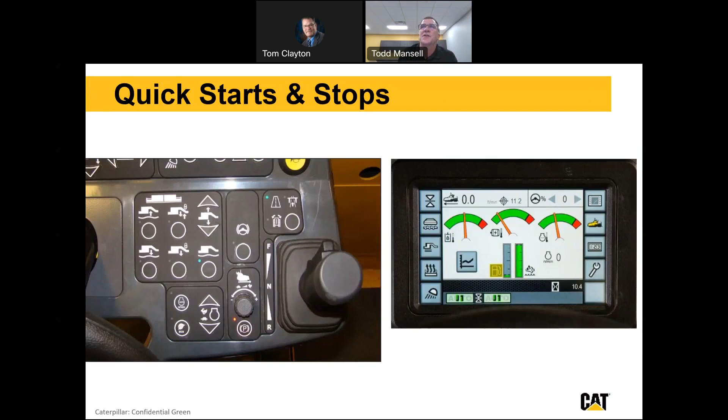I talked about the quick starts and stops earlier during the truck exchange. So if I'm doing truck exchanges, I'm going to make those quick starts and stops. Sorry, I'm just checking my time here, I'm getting down. But those quick starts and stops are going to be our best friend for smoothness—so pulling off the starting boards quickly and then coming to a quick stop if and when we have to stop the paver.

So in this case there's separation marks. You've got your main screed fixed width, and then you've got the screed extensions. I follow that line and see where it ends up. So if I follow the line where the yellow arrow is in this picture, and it's inside the width of the main screed, the fixed main screed, so it's the inside edge of the extension that's causing that. It's a height mismatch between the extension and the main screed. So what it's telling me, because it's on the inside edge, is that that extension is lower than the main screed a little bit—it's cutting in or leaving that line.

So what I have to do is hold the screed extension height button. There's an up and down arrow—one button to raise it, one button to lower it.

I'm just going to hold it. It moves really slow, so raise that extension until that line disappears. Once it disappears, I'm good. It usually just takes a few seconds to get rid of that.

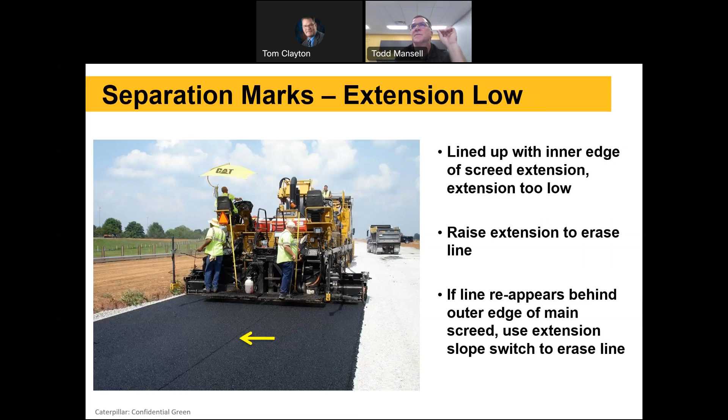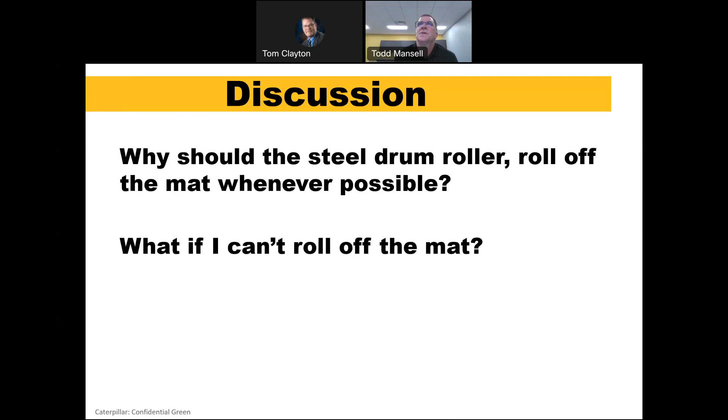Another mat defect: roller bumps. So roll right off the mat whenever possible, instead of stopping on a hot mat and leaving roller bumps. If I've got room or traffic control allows it, these guys on the highway here in Minnesota just rolled off onto the cold mat at an angle to actually stop and change direction. It's not always possible, because we're on areas where we don't have the room, we don't have the lane open or adjacent area, or we're on the first pass where we can't roll off that edge. But when possible, it's a good one to do.

If I have to stop on a hot mat, these guys have nowhere to go. They can't roll off that edge on the first pass here, or on that unsupported edge. So when they do have to stop, in this case for a water fill, stop as far back as possible on the cold mat. Less chance of leaving any roller bumps in your mat.

What these guys did was they were on a smoothness job upstate New York, and they were getting dinged a little bit on their IRI. They had the roller bumps, and long story short, they figured out when they were stopping to fill up with water, the roller was sinking in the mat a little bit, leaving marks. So what they did was got in the habit of stopping further back to fill up, and in this case, parking on the shoulder, because they're not measuring IRI on the shoulder. They had to actually get a longer water hose for the truck so they could do that. But you guys all know it's a lot of money in IRI penalties if you're getting dinged on these.

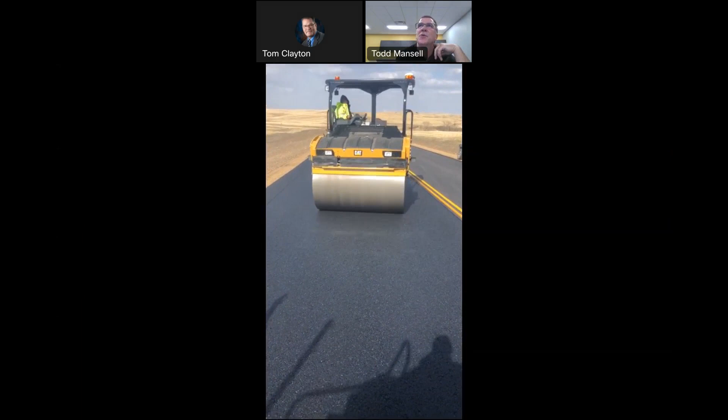I think all I'm showing here is just coming up to a stop at a turn or at an angle at the end of the roller pass. So that's another big thing. Why do we want to stop at an angle? Because those marks will roll out.

At the end of a roller pass, the next little video clip here is going to show you how not to do it. So here we've got the roller coming up, stopping square on the mat. And what happens here, it pushes that mix forward, and the mix builds up in front of that roller drum. At some point, that roller is going to come along, hit that same area and go bump up and over that mix that it's pushing forward. You can really see it in the bottom right. And then once it goes up and over that, there's our bump in the mat.

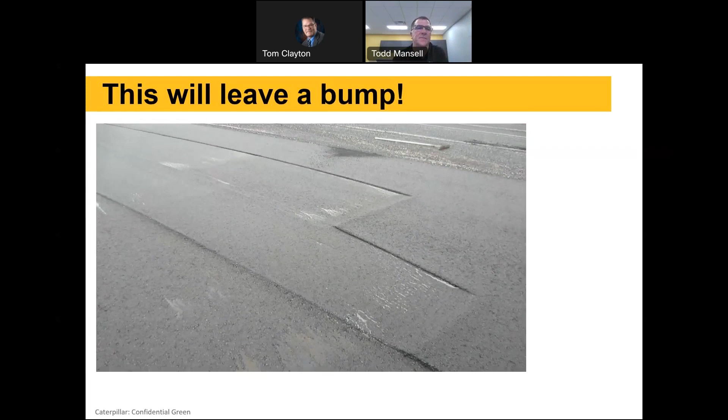So our best practice here is to shut the vibe off and then come to an arcing stop, or stop at an angle. Then when we come back on the next pass, we want to just roll straight through this area, because vibe is off now in that last 20, 30 feet or even more, where we shut the vibe off before we come to a stop. So we want to make sure that gets vibed, so the next pass we don't stop in the same area. We go straight through with vibe on, and then do the same thing just a little further down the road. So it's like a constantly moving starting and stopping point, if you will.

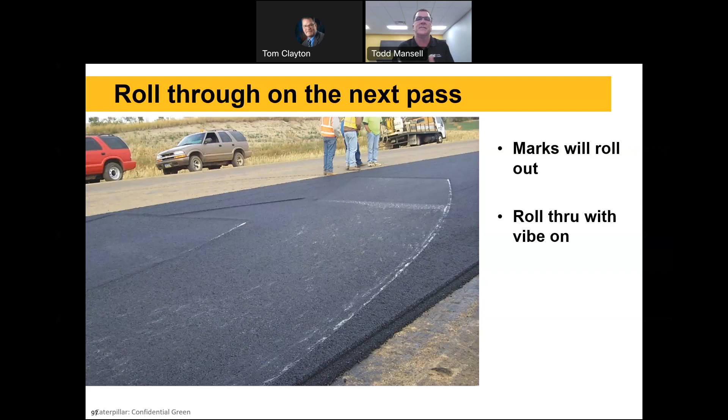So be careful not to stop, even at an arc, in the same spot all the time, or you're still going to have a bump. But when we stop at that angle, when we do roll through it straight through with the vibe on, because it's at an angle, that mix has got room to move laterally, and you don't build that mix up in front of the drum and get that bump in the mat.

Another thing, roller speed. Chatter in the mat can also be caused by rollers. 10 to 14 impacts per foot is our recommended range, and it doesn't matter—I think almost all, if not all, the highway class rollers on the market today have gauges that either tell you if you're in that 10 to 14 impacts per foot range, or you can go in there yourself and actually select it, I call it cruise control. You can set it so that when the roller goes full propel, full speed, it's limited to that 12 impacts per foot in this case. So you can't get going too fast and end up having chatter and bumps in the mat.

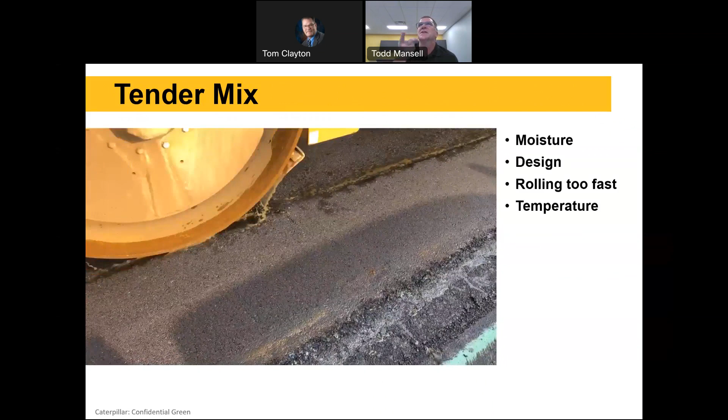Tender mix, that's one thing sometimes we deal with, and I think this will be my last topic here. If you get that mix that's pushing and shoving underneath the rollers, nasty. It's kind of hard to see here, but look closely at the mix in front of that drum. You can already see it's kind of ripped or torn there along where that roller drum went, but it's pushing and shoving. It's not compacting.

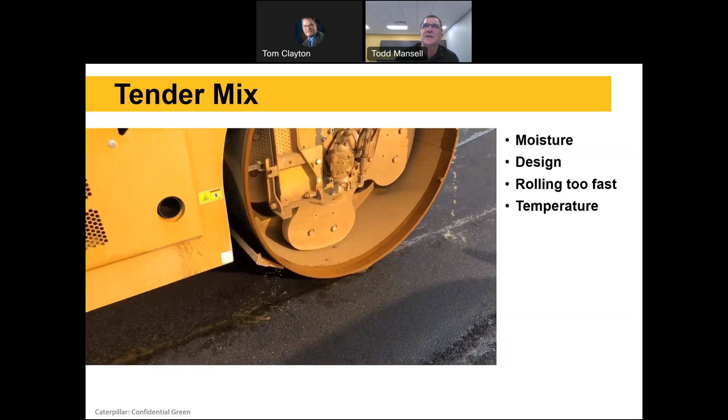There's two main reasons I see tender mix. It could be a bad mix design or just not a great mix design, but that's generally not the case. Most times it's moisture in the mix that didn't get fully dried, and that moisture is getting released in the field. We get it mixed at the plant, the rock's got moisture trapped in it, and as that mix is transferred from the plant, whether into silos and trucks or straight into trucks, that trapped moisture in the aggregate is now getting superheated as heat moves from the outside of that rock toward the center. It evaporates and that moisture releases, and then it's just like trying to roll on marbles.

Typically, if we have tender mix, it'll be in a range or zone that you have to identify in the field. A typical number might be 230 down to 190 degrees - it's pushing, shoving, all that. Anything above that, it seems fine under the rollers. Anything below that 190, it seems just fine under the rollers too. But in that tender zone, it can be a nightmare. So again, maybe it's mix design, and I do see that sometimes - sometimes our specs force us toward tender mix designs based on our job mix formula. But most times it's just moisture in that mix.

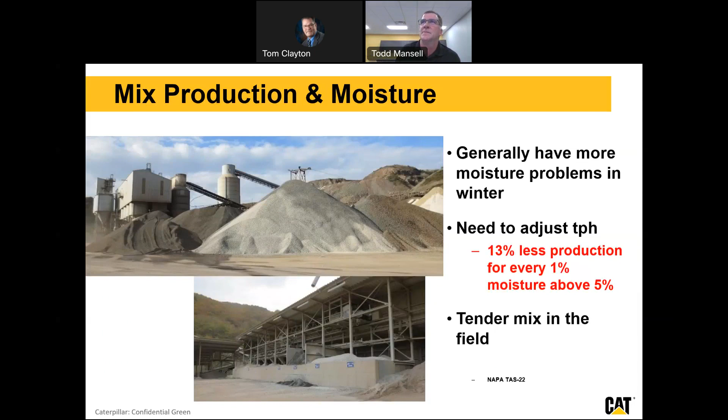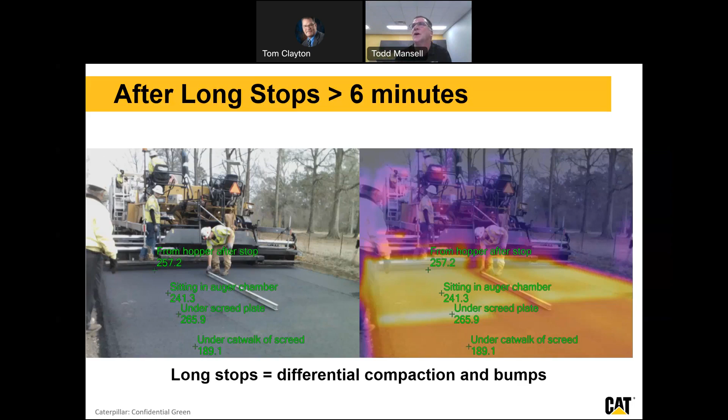Short stops aren't gonna kill you, right? It's the longer paver stops that are gonna cause problems. So in summary, to kind of simplify it, avoid all the stuff I talked about today - I call them basics, avoid the big mistakes. The long paver stops, the spills on the grade, running that hopper low which causes segregation, head of material, with the rollers 10 to 14 impacts per foot, and pay attention to the truck exchange.

So again, in between trucks, not running that hopper low, avoiding spills on the grade, and being very conscientious about folding the hopper wings. I'm a big believer you can do it if you do it consistently and don't spill material in front of the hopper when you're folding the wings.

Managing that head of material at half auger height. Again, you've got 4 ways of doing it: your conveyor speed, your feed sensors, your auger height, and your mix height dial. Bumping the paver, just let the paver pick up the trucks. And with the rollers, again, stopping at an angle on the mat, not stopping square on the mat.

And whose responsibility is it? Again, I always like to say, if it's everyone's, it's no one's. So some of it's equipment maintenance and cleaning. It's the paving crew, probably at the end of the day, cleaning the springs on the end gates is likely the paver crew. Other stuff would be the shop. But it's really teamwork.

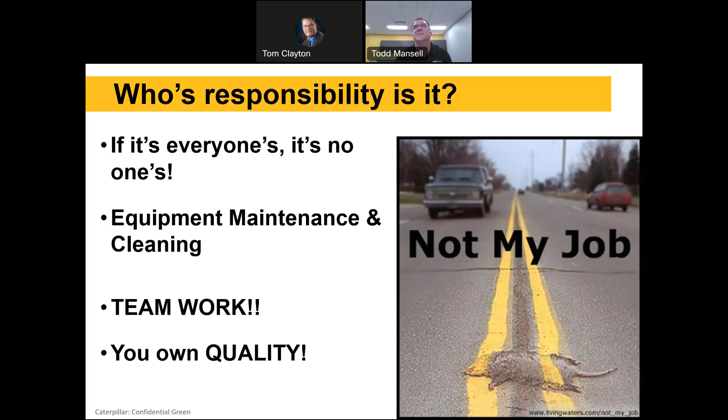And communication, right? And you own quality. You're the one in the field on the job. So it's the teamwork, the quality, and the profit. Doing the fundamentals right, being consistent, avoiding those big mistakes.

And I always like to say talking to each other, and it's everybody involved, right? Not just the paving crew, not just the plant, not just quality control, it's everybody involved, including the inspector on the job. So quality costs nothing, right? None of what I showed costs any money. It just costs paying attention to detail.

So I've got a compaction troubleshooting chart and a mat defects troubleshooting chart. I'd be glad to share those with Tom, or they'll be available if you guys want those. So that's all I had today. I want to thank you very much for your attention, and I'm here if there are any questions or anything to follow up with.